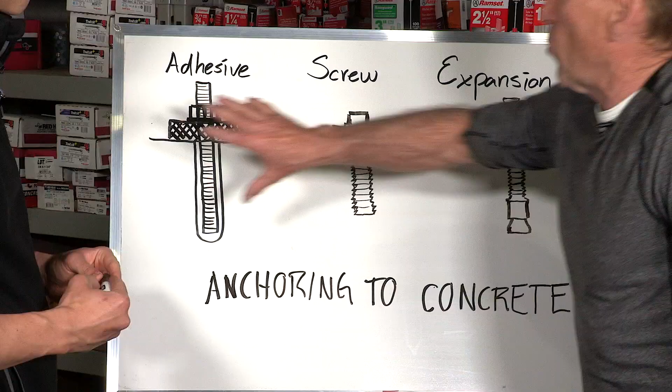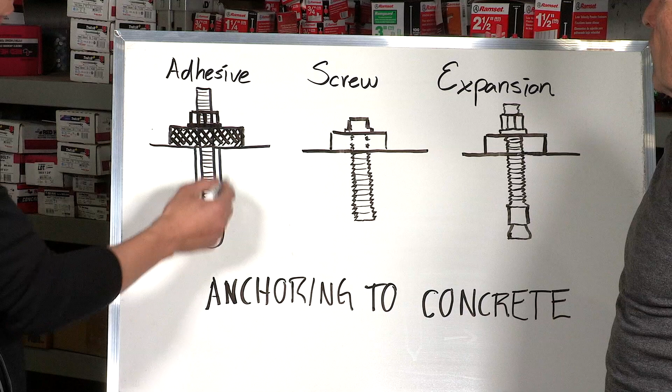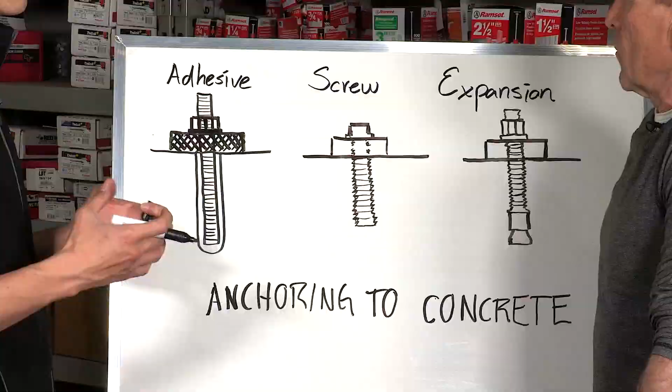Adhesives, I believe they're versatile. There's a bit of work that goes into installing them because you have to drill, pump the adhesive, put the rod in, but they're definitely very strong, and they work by both mechanical interlocking and friction of the hole against the adhesive, as well as chemical adhesion. So the installation would be critical in this case, I guess. Yes, that's right.

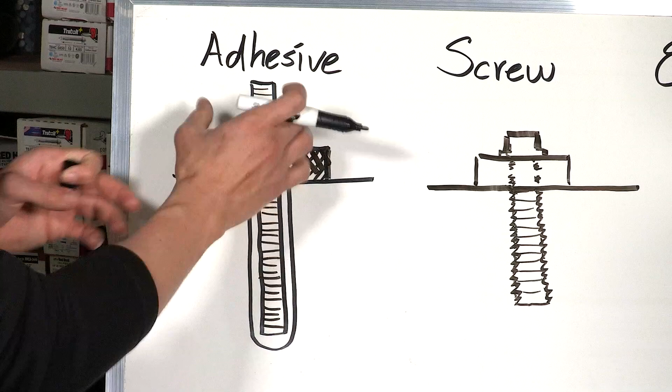So, aside from just how deep or how wide you would have to drill and what anchor to use and what adhesive to use, it's critical in terms of how clean it must be so that there's no debris between the adhesive and the concrete, because that creates a slippery surface and then it reduces the strength of the adhesive.

Would you say that of the 3, the adhesive can be the strongest? It can be the strongest. I would say in most cases it is, because of how deep you can go, how wide you can go. It's just that installation of it, it's critical that it's done correctly. Okay, we got an example here. It would be this one right here. So this is adhesive, the hole is drilled, adhesive is placed inside the hole, and then the fastener is put in there.

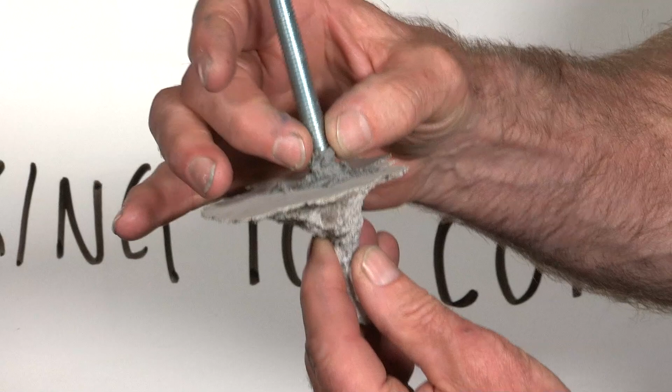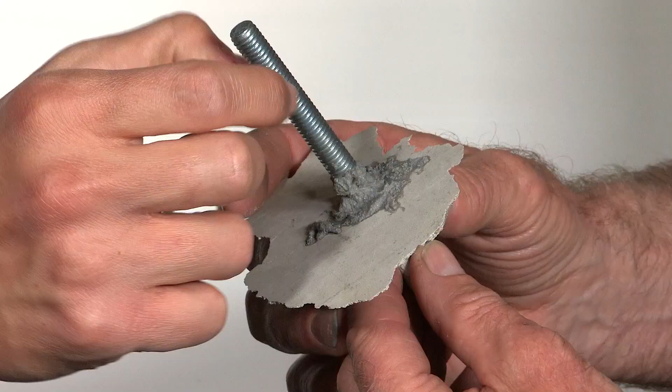Is there anything about the width of the hole versus the width of the fastener that's important? There is an equivalency or a chart that you have to follow. Each manufacturer is different, but there is a ratio or a distance that you have to keep between the diameter of the rod itself and the diameter of the hole. Now the rod surface is often variegated in order to provide some mechanical adhesion?

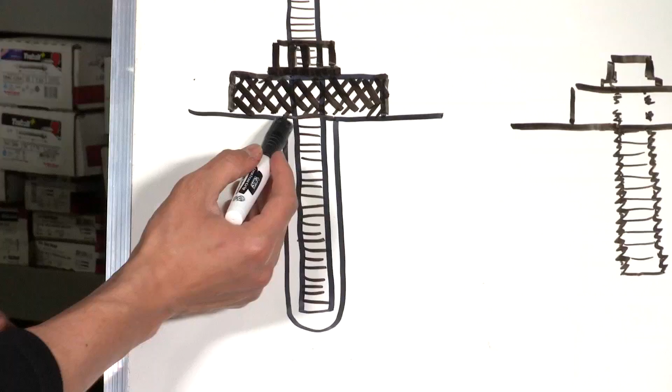That's right. So when this sort of anchoring mechanism fails, it fails at the interface between the adhesive and the concrete. Oh, okay. I'm not saying it can't happen, but a less likely one is between the rod itself and the adhesive.

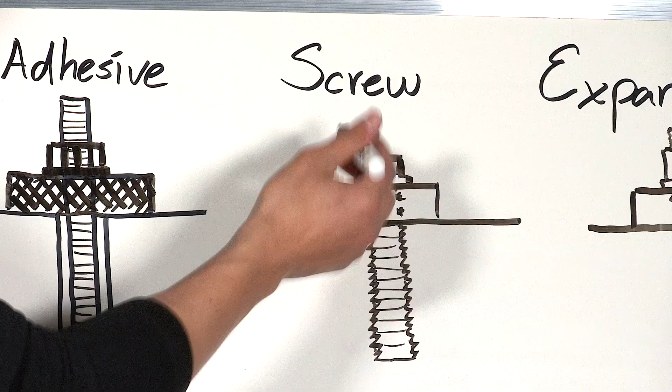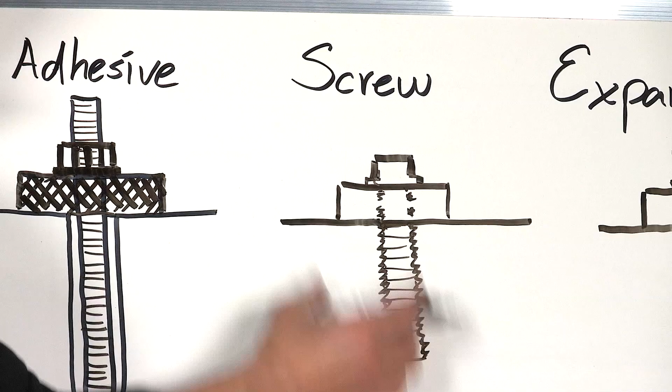Okay, so let's talk about the screw now. Now you've got a direct connection between the concrete and the screw. So in this one, there's still need to drill, but the threads are interlocking in the concrete, and installation overall is much faster. Just drill, barely enough cleaning to remove the excess, and then drive your screw. So higher productivity, possible failure depending on the quality of the concrete, I would think.

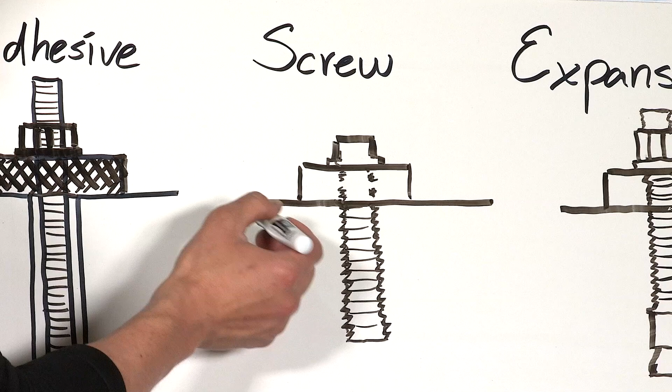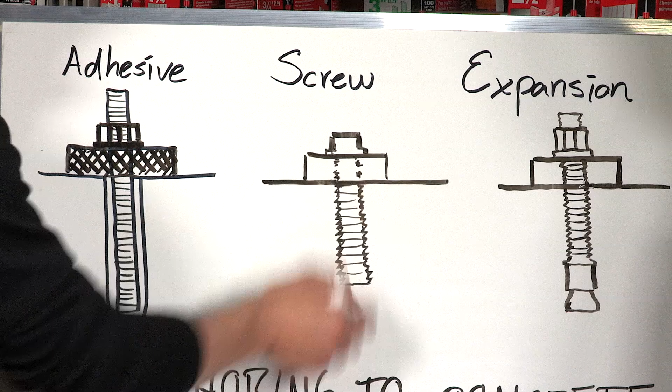Yeah, so there's 3 different kinds of failure. Just like we talked in the last episode, with concrete substrates you can have the concrete breakout, you can have the rod or the screw or the mechanical anchor break, where you're overcoming the steel strength, and then you can have whatever interlocking or interacting mechanism fail, so the threads might just break off and the screw will come out.

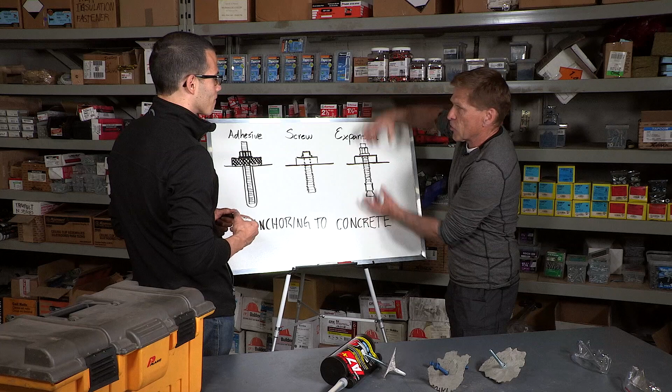Now the expansion is a little different than the screw. With the screw, you're providing adhesion throughout the shaft. That's right. In this particular case, it's really kind of an expansion. Well, how would you describe the forces behind an expansion? So for expansion anchors, and it varies because you can have sleeve expansion anchors or wedge expansion anchors, it all happens by opening a certain section or clip of the anchor. That provides pressure on the concrete, and that lateral pressure is what gives you that vertical tensile strength.

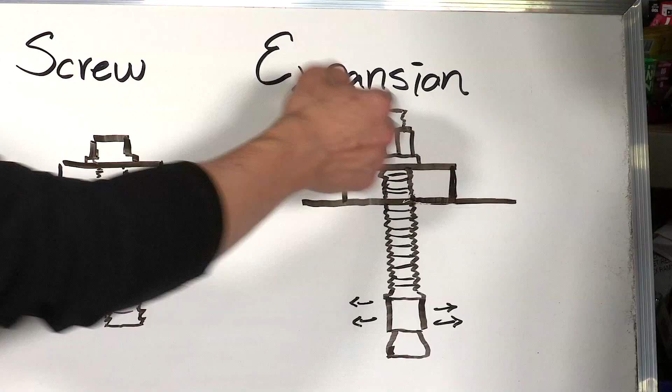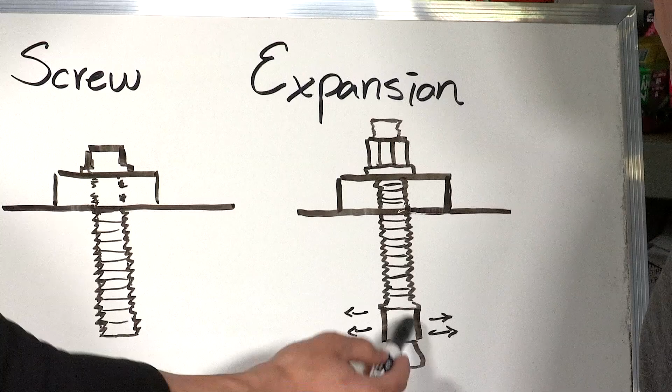Now, and you provide that pressure by driving this screw down, right? Yeah, so there's the drilling side of it, then you have to hammer in the anchor itself, and then you have to torque it to what they call a setting torque, in order for this to expand enough so that you can guarantee the performance.

Gotcha. Okay, we've got examples of all three here. Tell me what I'm looking at. So this would be an example of an adhesive failure, 3/8 rod. Then this is a screw anchor, 3/8 screw anchors as well. And then this is a wedge anchor, 3/8 wedge anchor.